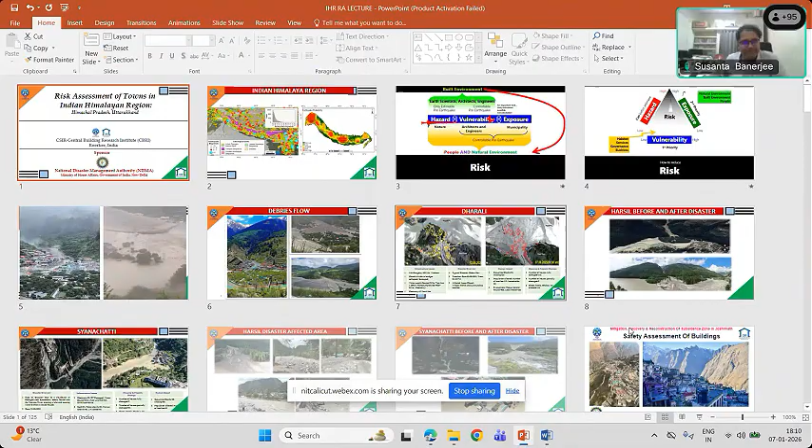Yes, your screen is visible. Now, is my slides visible and am I audible? Yes sir, you are audible and your screen is visible, sir. Over to you, sir, thank you so much. So now, how much time slot do I have? Up to 7:30, including Q&A discussion. Okay, 7:15, I'll try to wind up.

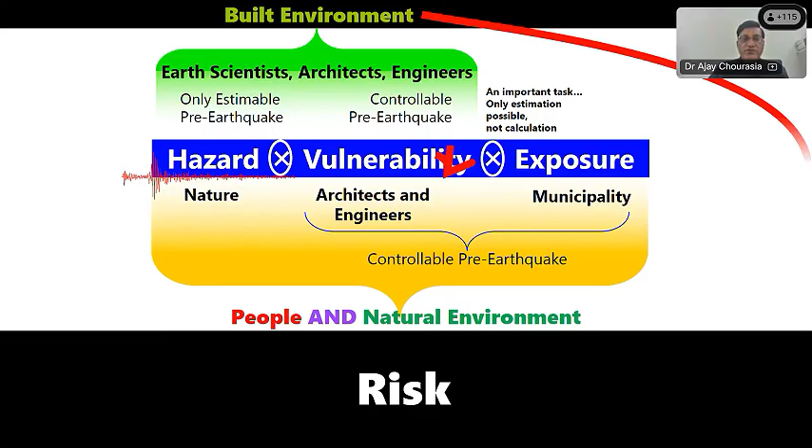So now, moving ahead from risk, how do you assess it? We need to prioritize it. As I mentioned, hazard - if you are sitting in a low hazard area, that is fine. But only things which are in our control, we should prioritize.

Our first priority should be the vulnerability of our infrastructure and buildings in particular, because it is directly connected with the loss of life. Exposure and other things are a second priority, and the third priority is hazard, which cannot be treated as a priority but can be estimated and understood in advance.

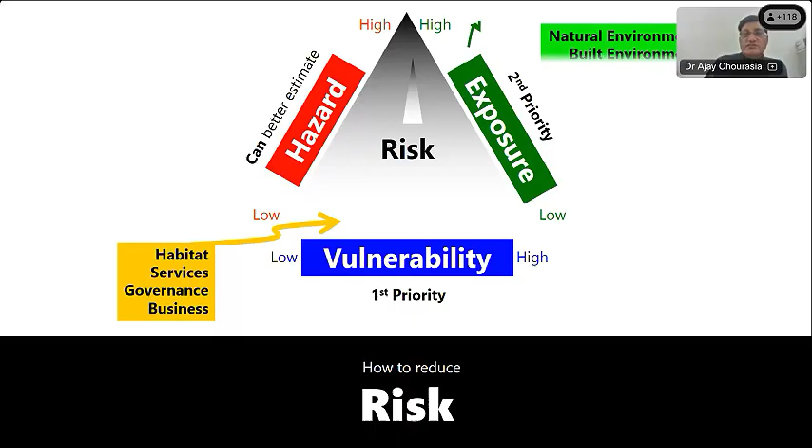So who is responsible to control the vulnerability? All engineers, all of us. So how to do it? That is one of the important tasks.

But before going into seismicity, I want to show you this landslide in Dharali. You can see heavy rock debris.

This video can tell you how hazardous the Himalayan region is. This is basically Dharali, where the incident occurred on August 5th. This Dharali town is a very important, strategically located town in Uttarkashi district, at 2500 meters above mean sea level. It is almost flat land here, but after crossing a few hundred meters, a steep slope comes, going up to 4600 meters, which is the foothills of Shrikand hills, and beyond that glaciers are there. That entire region is moranic deposit.

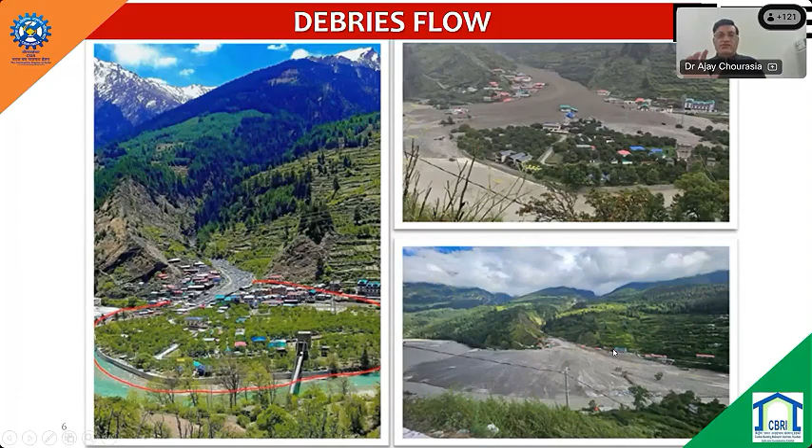This is the before and after picture, which can tell you the magnitude of the disaster.

Similar kinds of things happen. So this is Dharali. All the habitats were washed away, which is causing loss of life, property, and entire infrastructure in the region.

In a similar fashion, very next to Dharali, hardly 8 kilometers afterwards, the incidents happened on the same day. You can see the pictures before and after the disaster. This is nothing but excessive rainfall and debris flow, and how the habitat is affected because it's sitting on a steep slope or flat ground.

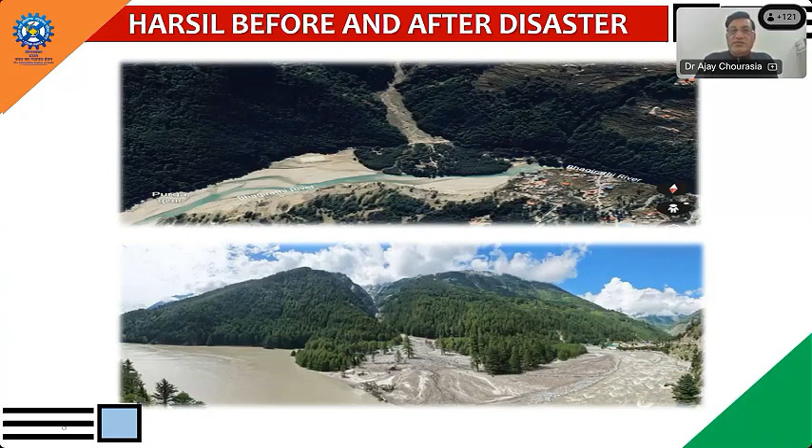Not only earthquakes but other disasters also occur. Similar kinds of incidents again happened in the same district on the 22nd of this August.

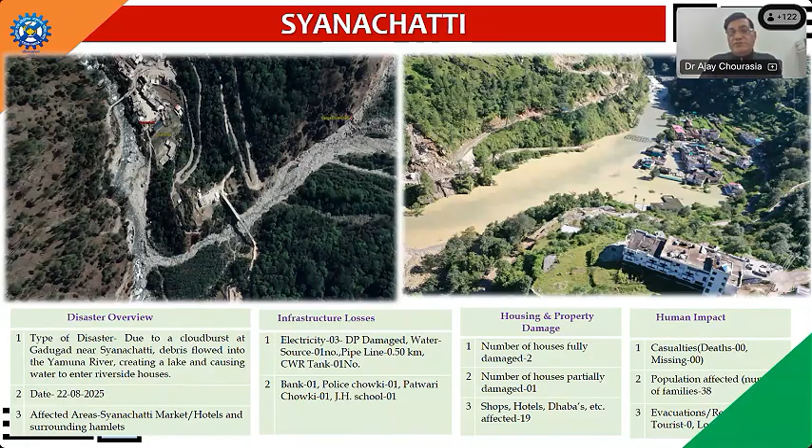What exactly happened here is: because of excessive rainfall, the landmass flowed away and the entire Yamuna river was blocked, and an artificial lake was generated, submerging the entire town called Syanachatti. You can see this town on the right side, totally inundated, with two-story buildings totally submerged. After the breaking of this temporary, artificial dam, when water washed away, all the houses were filled with mud. So just imagine, not only property but loss of life has also occurred.

Again, I will take you to January 2nd, 2023. You must have heard about the Joshimath incident, where the town you see here was under threat. It was huge subsidence of landmass, as reported in the media, and we were called to help in this disastrous situation.

When I went there, around 2500 buildings were sitting on a moranic deposit. Because of excessive discharge of water at the foothills, excessive subsidence occurred. At that point, water was emanating and subsidence was happening, and it affected not only the buildings but all the infrastructure, including roadways and hospitals.

One second. Hello, am I audible? Yes sir, you are audible. Okay, thank you. Dr. Banerjee, whenever something happens, please ring from your phone number. Sure sir, thank you.

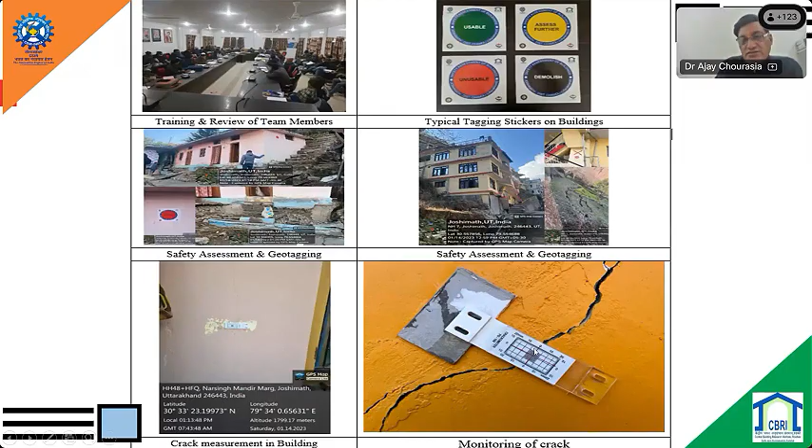Because of subsidence, this crack meter was placed across the cracks, and everyday measurements were taken. After the measurements were taken, we classified the buildings as per different damage classifications, which are adopted in our Indian standards as well as internationally.

According to that, we pasted stickers on each building: usable (green color, assess further), unusable, and demolish. Wherever it was risky and needed assessment, we vacated such buildings. Wherever no damages were there, people were allowed to continue staying. But in the red and black categories, we totally removed the people and demolished certain buildings also.

This kind of instant reaction and preparation comes from your past experience, because at that point people have a lot of expectation from you to help them. Based on the data collected over around one month, each building was classified under different classes—red, yellow, green, and black—and the entire region was divided into 9 wards, with buildings classified as shown here, indicating how many buildings fall under each class in each ward.

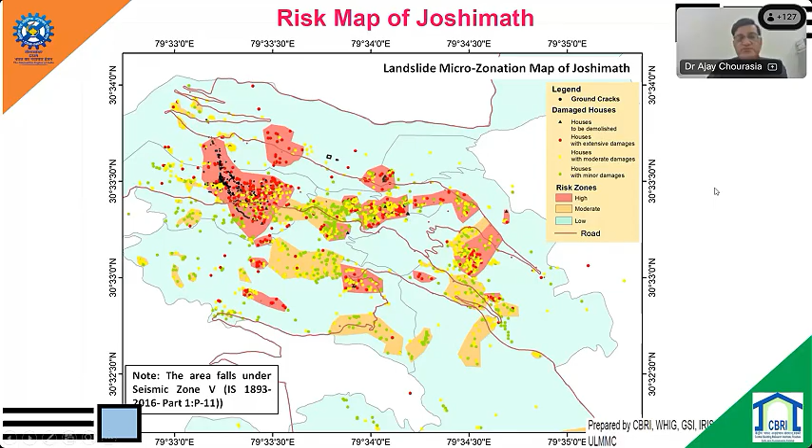Having faced this kind of scenario, now you will come across what the seismicity of this region is. As it is understood, it is very high, and the entire Uttarakhand or Himalayan region is classified under seismic zone 6 in the revised seismic zone map of India. In this revised map, you have to see that the importance of the building is not reflected.

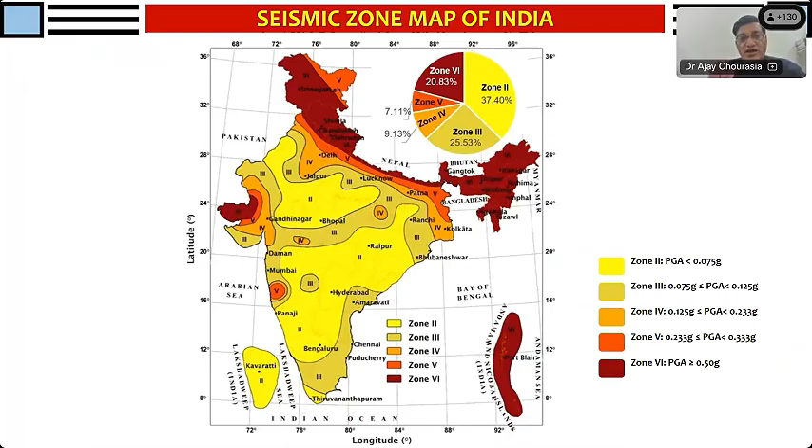You have to find out your zone factor based on the return period, and these return periods are classified based on the importance of the building. For normal buildings you are asked to take a return period of 475 years, and for important buildings or critical infrastructure, it is 975 years. As you go to a higher return period, your Z value also increases. But in short, I want to tell you that this entire region is under high seismic zones of India.

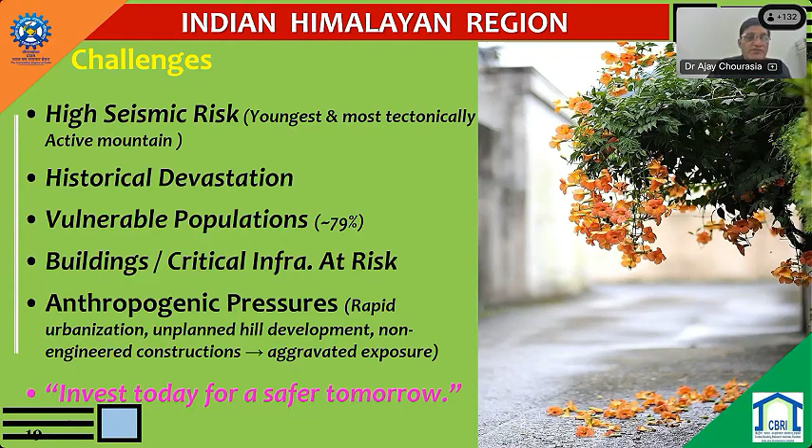Now, when I talk about the Indian Himalayan region, what are the challenges? It is a high seismic region. As I mentioned, historical devastation has happened enormously in that region, and around 80% of the population is highly vulnerable. They are sitting on very high vulnerable locations, steep slopes, and other things. All buildings are at risk because most construction is happening using unreinforced masonry, which is known for collapse even under moderate shaking. In addition, anthropogenic pressure - rapid urbanization, unplanned hill development, non-engineered construction - has aggravated the exposure of the community at large.

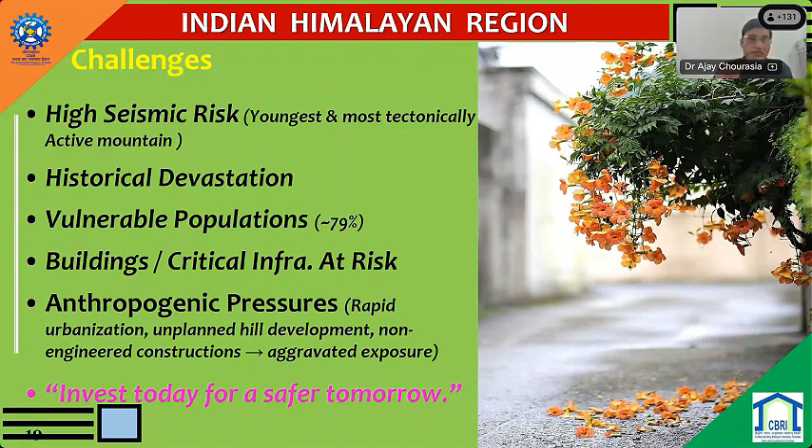So this is high time we need to think about this particular region. As I mentioned, for risk, you have to focus on the central pillar, that is vulnerability. So our objective was to take up the risk assessment study for towns. We were asked to take it up for 6 towns, 3 in each state, Uttarakhand and Himachal. For that purpose, we conducted a detailed study related to hazard, vulnerability, exposure, and risk. With this project, we came up with a very simplistic procedure for estimation of risk, and that's what I want to focus on during the discussion.

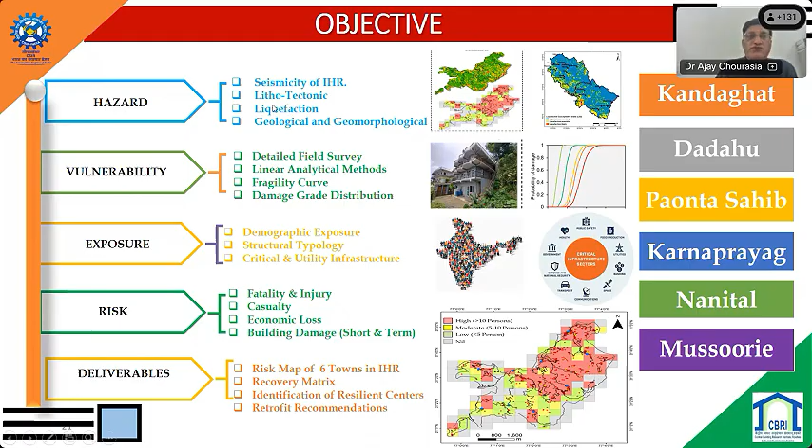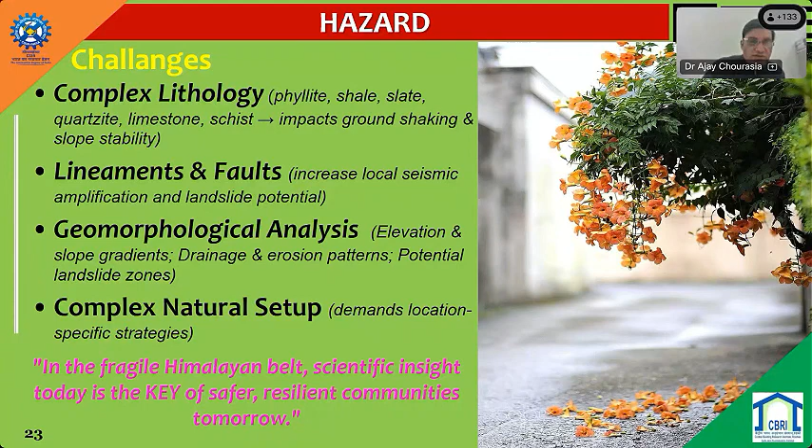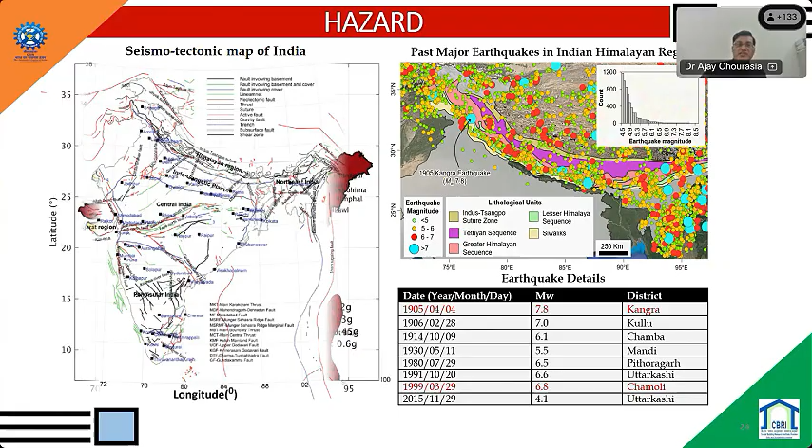Our revised or updated Indian standard also mentions seismic zone 6, and over and above, we have studied the geology of that particular region - thrust and fault, lineament information, geotechnical properties, and susceptibility assessment. So we have not conducted any new study, only reference values from the literature have been taken.

In addition, we have the map of earthquake and liquefaction. Earthquake hazard is very clear in that particular region. For liquefaction, people have reservations saying it will not occur, but at a few locations there is a possibility of liquefaction. So that aspect cannot be ignored and has also been considered in this study.

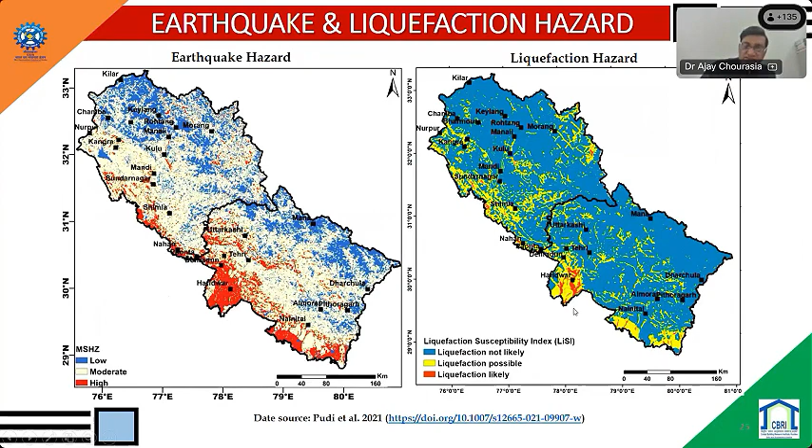In short, we have to take a holistic view for assessment of risk. So now we are focusing on one of the components, that is hazard. For that particular component, we are not conducting any new research at this point, but taking reference from the latest literature related to hazard in that study area.

From our seismic zoning map, it is very clear that this region is likely to experience a PGA of 0.7 G, and that has been taken care of in the study. From the extreme rainfall or landslide point of view, we have correlated landslide as a result of excessive rainfall. Landslide will occur only when sitting on a very unstable strata or slope, and extreme rainfall causing more than 50% ground saturation results in landslide.

Now, whenever an earthquake happens, there will be subsidence. That hazard level has been marked in terms of displacement - the spatial distribution of hazard in different classes: more than 5 centimeters, 3 to 5, 1 to 3, and less than 1 centimeter. Similarly, landslide susceptibility has been estimated in terms of factor of safety - less than 1, 1 to 1.2, and so on. Based on these two aspects, the multi-hazard scenario matrix was created.

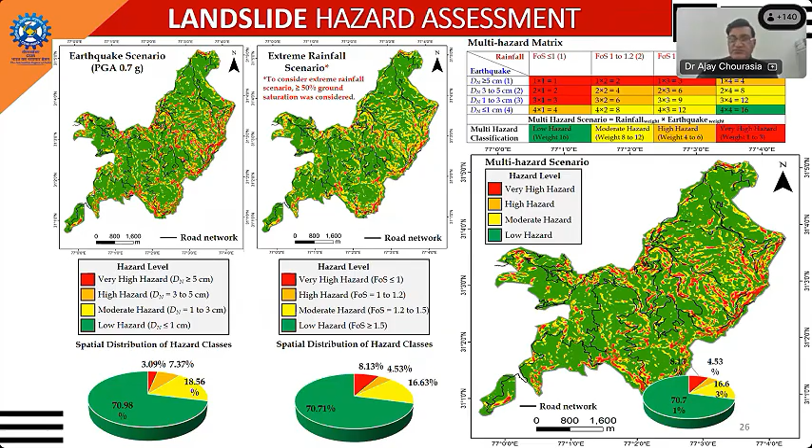Now the question lies about the vulnerability of our built environment. When you talk about buildings, 85% are non-engineered, unreinforced masonry, and soft story buildings have also come up in the run of this modern class of buildings.

These buildings are sitting on steep slopes, poor ground strata, where the amplification effect is likely to be significant. In addition, critical facilities like hospitals and schools are also constructed using unreinforced masonry, so they are highly exposed. The trend is increasing due to poor implementation of good construction practices and absence of bylaws. So physical vulnerability, social vulnerability, and economic strains are increasing largely.

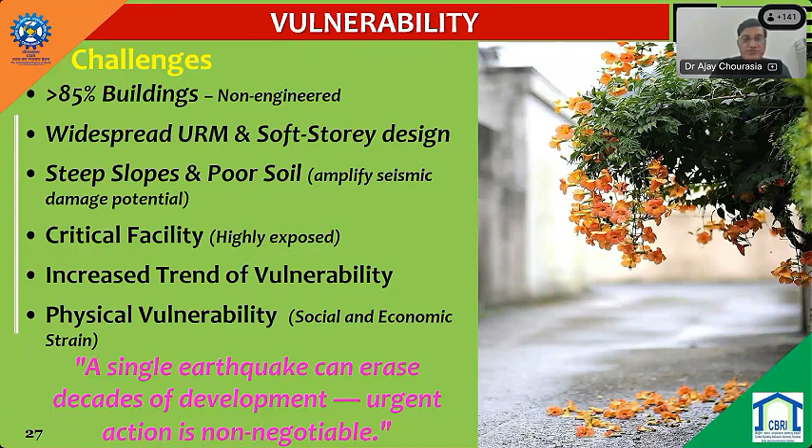We need to focus on that particular aspect. Our approach was to first conduct a survey, collect information about the buildings through physical survey on building typology, architectural aspects, seismic vulnerability parameters of individual buildings, and then whether the building is sitting on a steep slope, flat ground, or moderate slope ground - protection measures and other things have also been noted for each building, apart from construction aspect and distress assessment. This is what we covered during our site visit.

In addition, the data we collected has been utilized for development of a fragility curve. We have developed the fragility curve from an Indian perspective for unreinforced masonry and RCC structures, RCC buildings, by adopting a procedure I will explain. These two approaches have been adopted to estimate the risk of the element and the structure as a whole.

In addition, this is related to the earthquake. But what happened with the landslide? From a landslide perspective, we studied detailed geotechnical parameters, terrain conditions, and the saturation level in the ground in case of excessive rainfall, and that has been attributed to the risk of landslide.

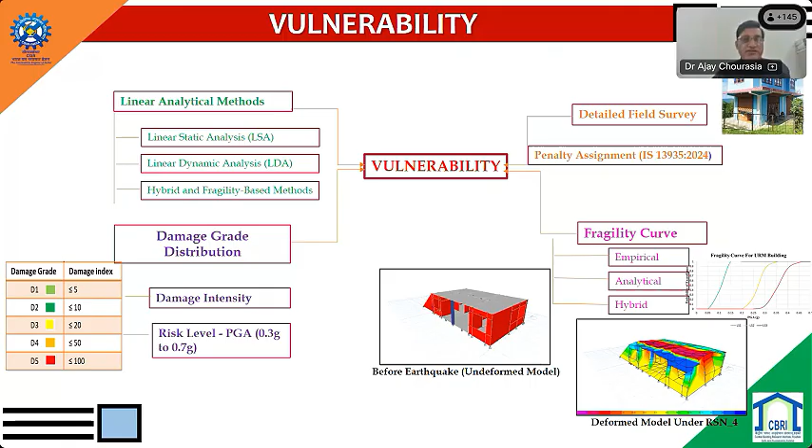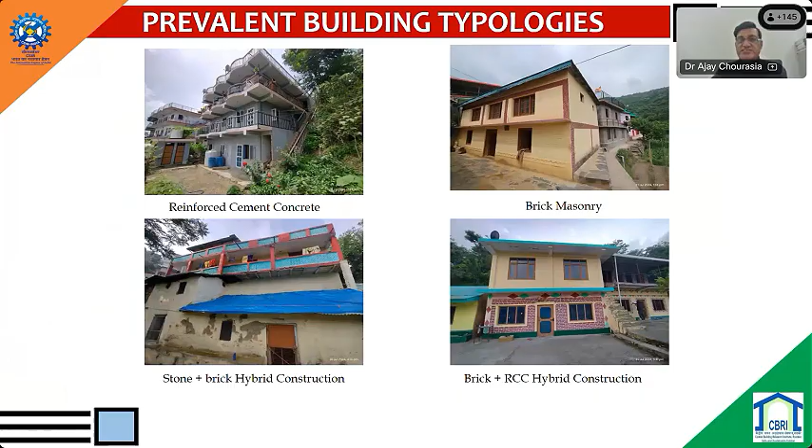This was done by conducting linear static analysis, linear dynamic analysis, and based on that the fragility hybrid curves were developed. This is the typical building typologies of different classes of masonry and RCC structures which exist in that study region. A detailed survey map and survey form have been designed, and this data collected has been utilized for grading the economic loss inducing factors.

So again, these economic loss inducing factors as per our IS 13935:2024 give emphasis on features like siting and ground issues, soil and foundation condition, and thereafter architectural features and elements, then structural aspects and materials used for construction.

And corresponding to each parameter, some penalty assignment has also been given, which is in the code, and which we have modified based on ground conditions and past vulnerability or loss which has occurred in earthquakes in Indian conditions. Based on the total penalty, subtracted from 100, less than 10 has been classified as minor, then 11 to 40 as moderate, and more than 40 points is classified as severe.

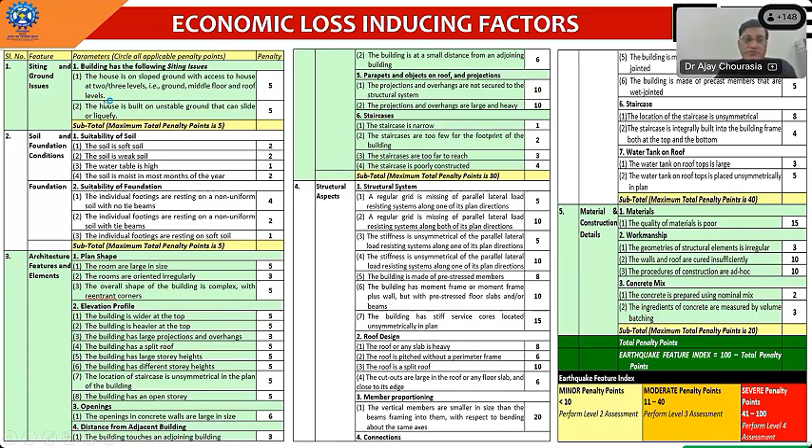So this is a very straightforward, not exactly prescriptive, but straightforward procedure based on site observations.

Parallelly, we have developed the fragility curve for masonry and RCC buildings based on different international standards like HAZUS, FEMA 273, MSK intensity scale, ATC 20 and 13, and so on. Then seismic as well as landslide aspects have been combined.

As you can see, the seismicity has also been related, whatever damage class has been categorized LS1 to LS5, corresponding to different kinds of damages and flow velocity of water. Based on that, the fragility curves were developed. So this is a multidisciplinary, multi-hazard fragility curve that has been developed.

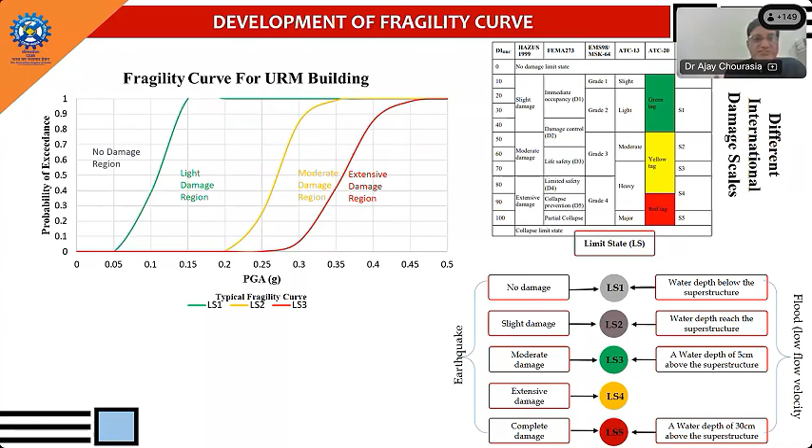So the fragility curve is basically nothing but the probability of exceedance of damage at varying intensity. In the present case, we have the PGA values for this particular region up to 0.7 G. So we have carried out detailed investigation and fragility curve development by adopting this methodology.

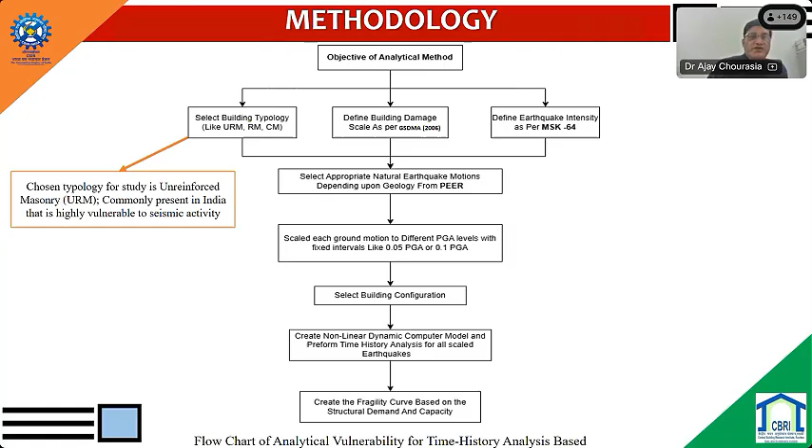This is basically a structured approach to develop the fragility curve for URM buildings. For example, in this case we have taken it in accordance with national and international standards. For national standards, we have adopted IS 1893/2025 provisions. Then unreinforced masonry provisions we have picked up as per Indian conditions.

Then for defining the building damage scales, HAZUS and ATC 20 have been adopted, thereby classifying the damages into three classes: light damage, moderate damage, and extensive damage.

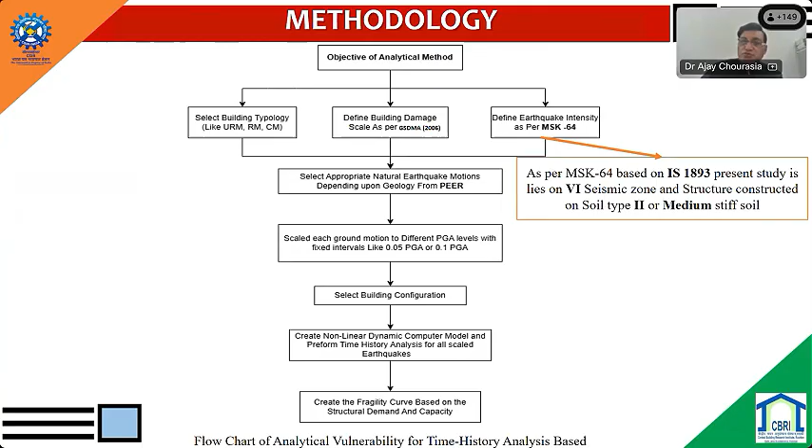Thereafter, as regards defining the earthquake intensities, seismic zone 6, 0 to 0.7 G has been considered with soil type 2 and medium stiff soil conditions.

Then for conducting the fragility curve development, we have considered 11 ground motions of similar kind of region from the database of the Pacific Earthquake Engineering Research database.

So while selecting these ground motions, you have to consider the geology and geotechnical aspects also, and based on that you have to pick up the appropriate ground motion records from the database, and you need to ensure the adequate scale factor achieved is not more than 2.

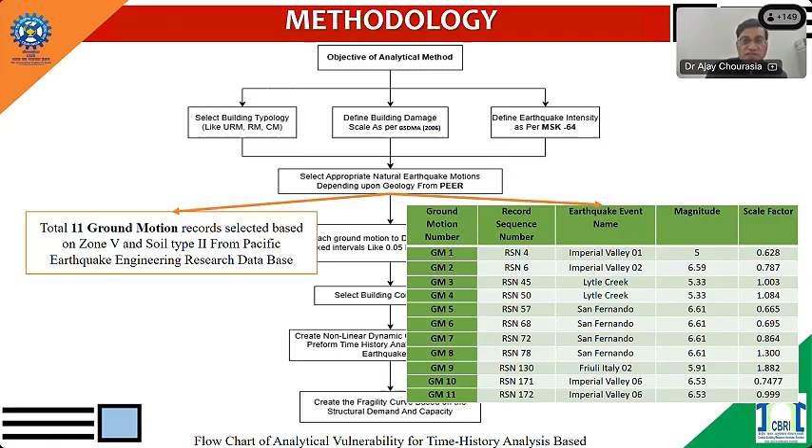That is again the caution while developing the fragility curve. Then all these go into developing the fragility curve. In this stage, we have selected the motions, and we have scaled the motions from 0.05 PGA to 0.7 G with the help of the Seismosignal tool.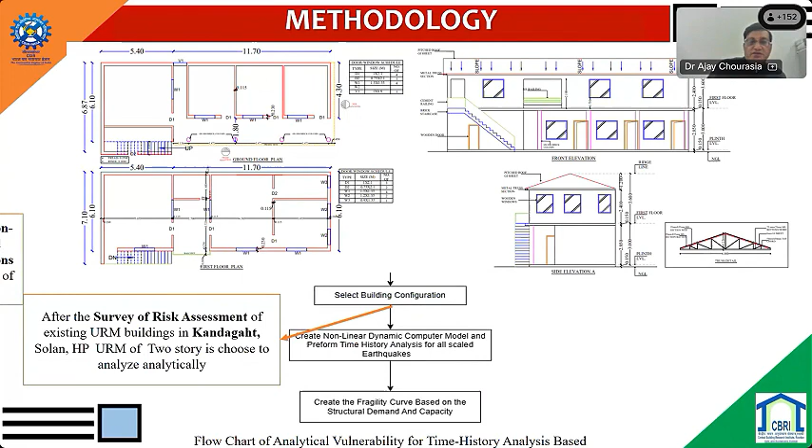And then after the survey of risk assessment of these buildings, we have selected a few real life buildings and their typology, material, as well as geometry to conduct such kinds of investigations.

With the help of ETABS, we have conducted the non-linear dynamic analysis of the buildings using 11 ground motions up to 0.7 PGA at the interval of 0.05 PGA, and recorded the maximum spectral displacement at the rooftop.

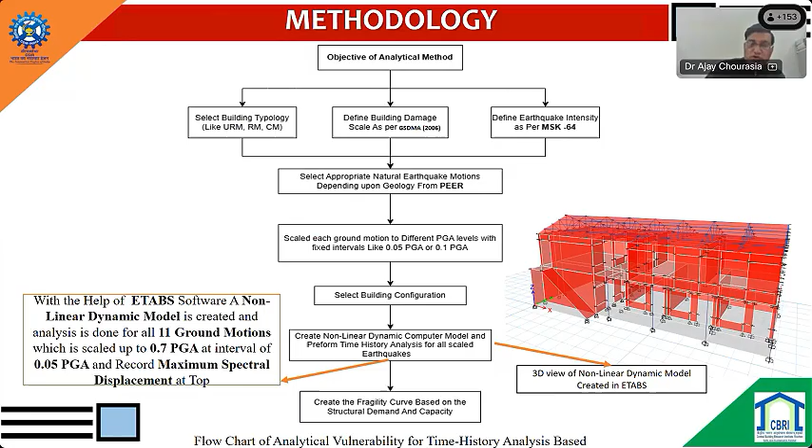Whatever displacement we recorded, that matrix was utilized for calculation of the post-probability density function. Thereafter, during this exercise, we have to calculate the cumulative distribution function, then standard deviations, and calculate the A and B constants as a random variable and mean samples.

So the steps involved are: determination of spectral displacement from non-linear dynamic analysis, then defining limit states in terms of light, moderate, and extensive. Then calculate the mean and standard deviation, and thereby the parameters A and B. Afterwards, for each LS1, LS2, LS3, calculate the CDF and PDF based on given A and B for different classes, then develop and plot the fragility curve.

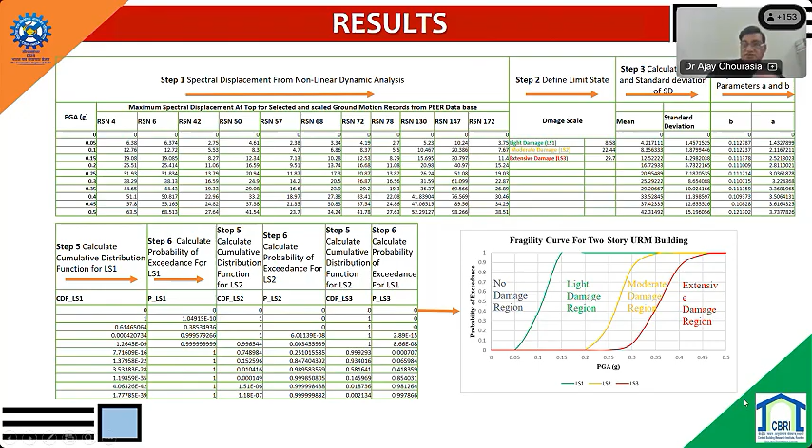So this is a very Herculean task, which we have completed after rigorous analysis. You can see that we considered all our design parameters, mode shapes, and other things.

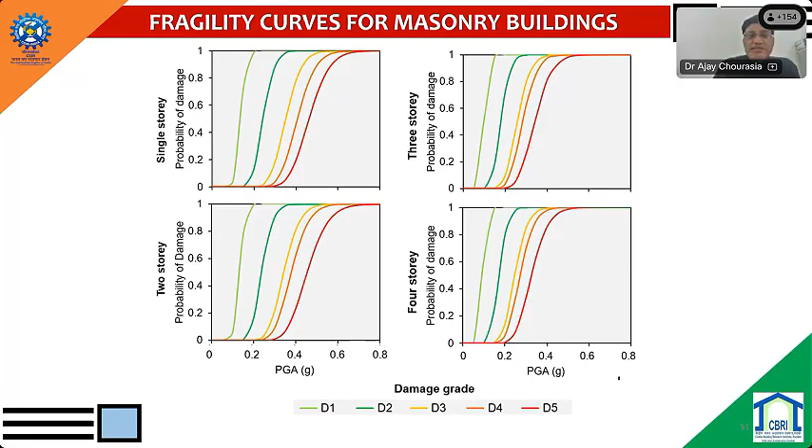This is how the unified fragility curve for masonry buildings for single story, 2-story, 3-story, and 4-story have been developed. Now the user can directly use these curves to classify vulnerability based on observations recorded. Importantly, this will give the state of damage at varying PGA levels. This exercise has been done for RCC buildings as well.

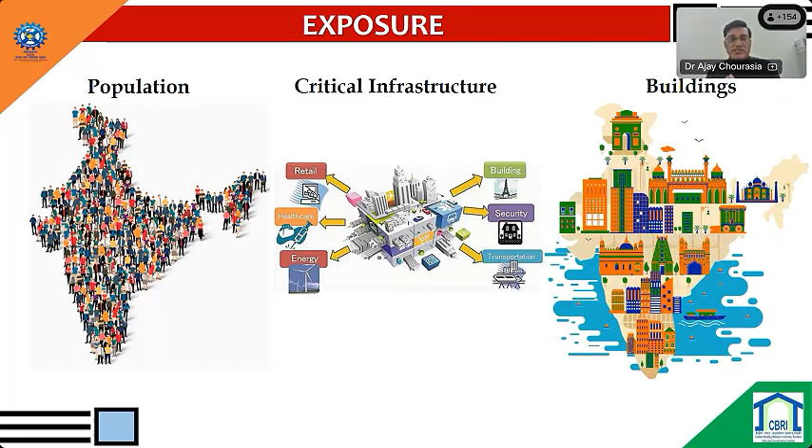Now, the third component is exposure. As mentioned, exposure is the effect to population and critical infrastructure, particularly buildings and other infrastructure, which includes buildings, schools, healthcare, transportation, bridges, and so on.

When you talk about the exposure of this region of India, it is at very high risk, because of the dense cluster of population at very limited locations. Assets and critical infrastructure are located in strategically very important regions. From the Indian perspective, systematic vulnerability assessment needs to be done for this region.

Based on this method, we have done extensive survey and fragility curve development, and data collection for exposure calculations and hazard. We have taken this from literature and past records.

Now coming to risk, we have developed a method to assign risk in terms of number of fatalities, injuries, homeless, and economic losses. For buildings, we assess how many are unusable, usable, and how many will collapse.

This model has been developed based on past damages occurred in various earthquakes in the Indian context for Indian buildings, and that has been classified in terms of a casualty percentage for computation of human losses, ranging from D1 to D5 category, indicating how many people are likely to lose their life or be injured.

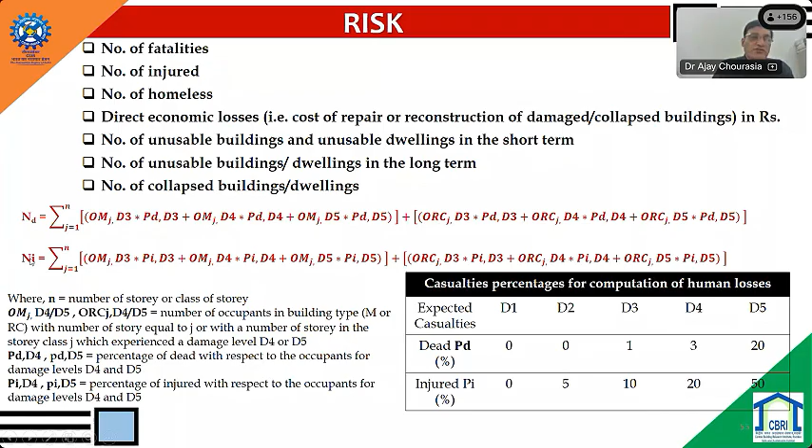This kind of matrix has been developed and implemented in this model to calculate the ND and NI. Similarly, the consequence model has also been developed using this approach to calculate the expected loss of property and other economic losses.

For this calculation, we considered the cost of construction of a building in that region as 30,000 rupees per square meter for masonry buildings and 34,000 rupees for RCC structures. In addition, damage grades have been classified from D1 to D5, and how many buildings will fall under three verticals.

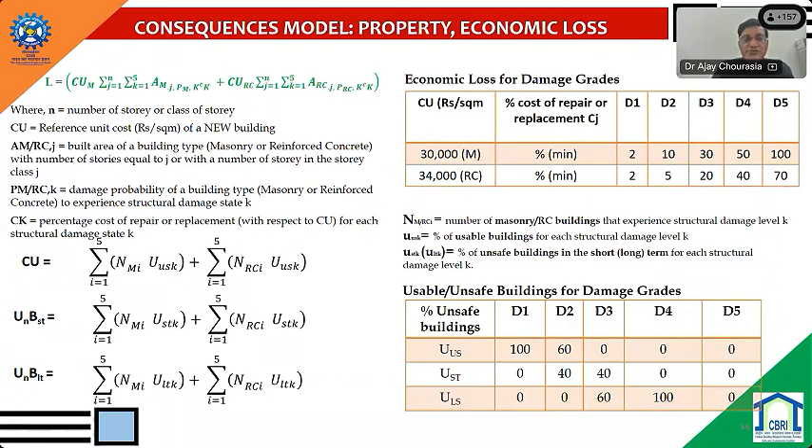So basically, as researchers, we have developed the modeling aspect. Then for the survey purpose, our engineers along with government and state PWD engineers did the survey, and the database was analyzed based on the methodology I have explained.

Now I would like to present before you one of the towns, that is Kandaghat, for which the detailed implementation of this procedure has been made. Kandaghat is one of the towns located in Solan district of Himachal, which is around 26.13 square kilometers.

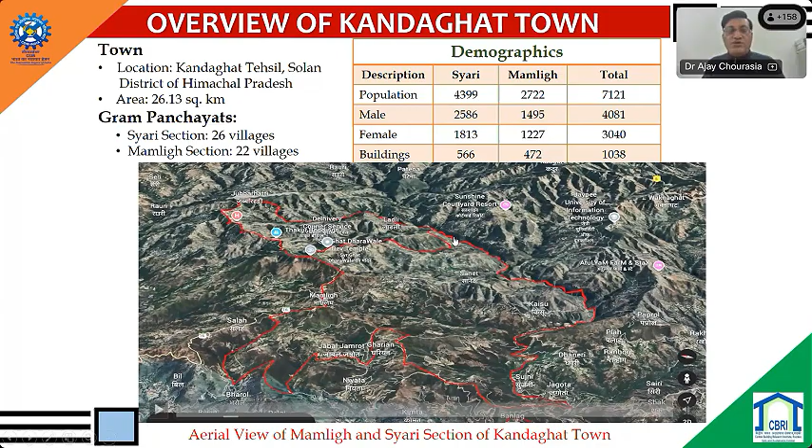You can see only 1,000 buildings sparsely located in 26 square kilometers in a hilly region, which is a very great challenge to do the survey, because to reach some houses we might have to walk for 10 to 15 minutes, sometimes 1 hour also. Very difficult task, thanks to my team.

This is about the demographic details of that particular town under study. Then the lithological features of the town have been studied in detail, and the vulnerability aspect has been studied by door-to-door survey, capturing the data and classifying the building class in different low, medium, or high susceptible locations by means of these dots.

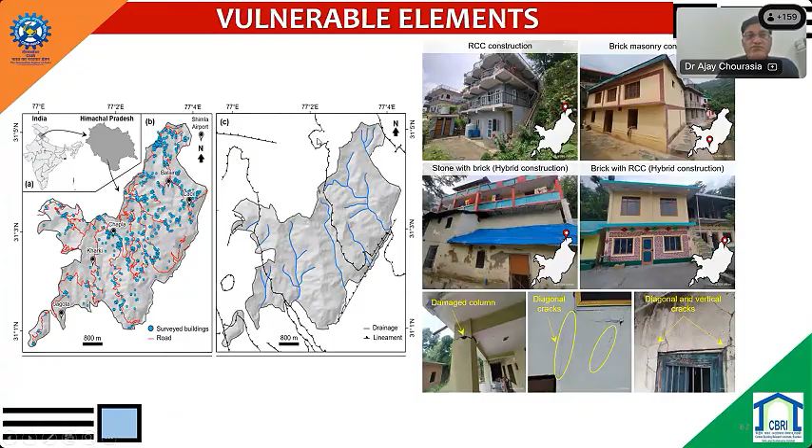Again, from a landslide point of view, the buildings located near steep slopes have been classified appropriately and demarcated here. For that classification, we considered building locations with respect to steep slopes, classified as less than 50 meters, 50 to 100 meters, and more than 100 meters under low, medium, and high risk classes from a landslide perspective.

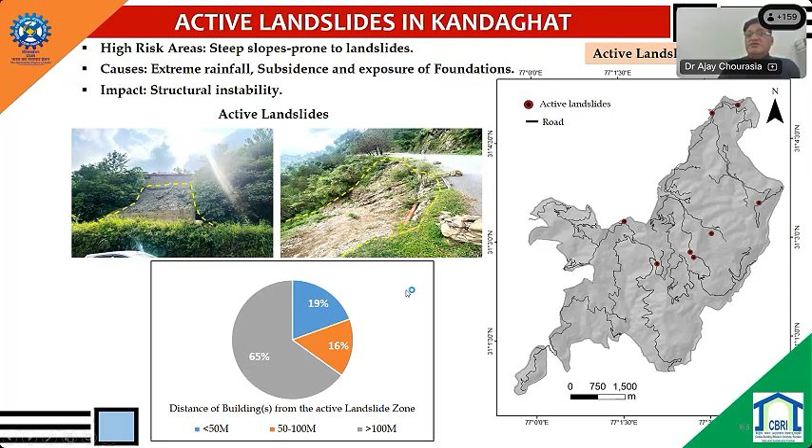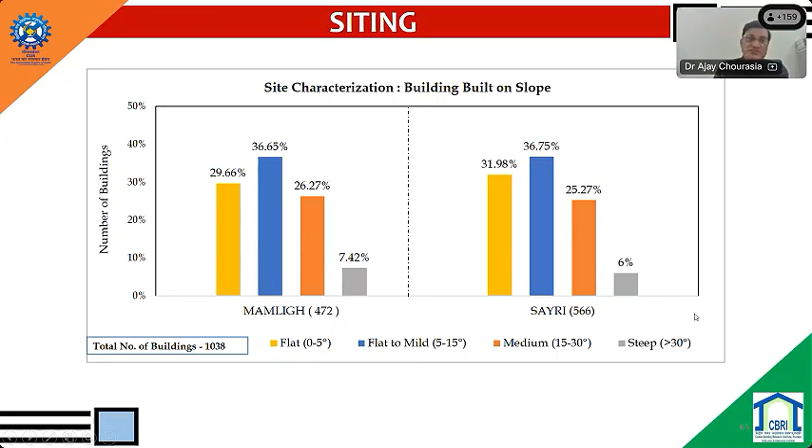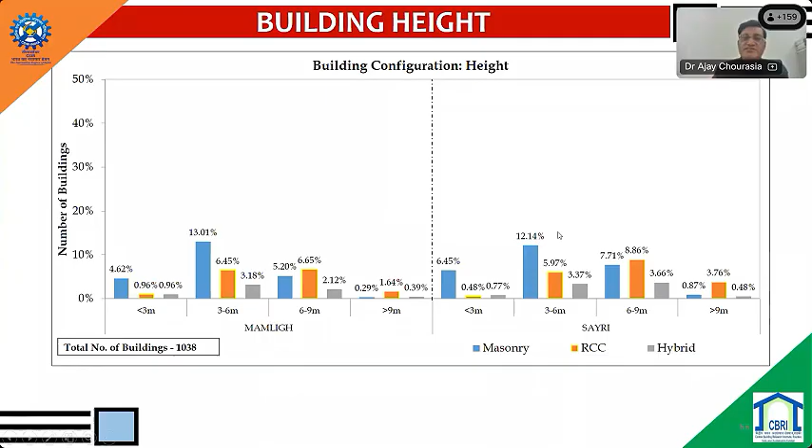So how many buildings are sitting on steep slopes, medium slope, or flat to moderately flat land? Similarly, in terms of height, we have to see how many buildings are 1, 2, 3, or 4 stories. Majority of buildings are 2 to 3 story buildings, majorly 2-story.

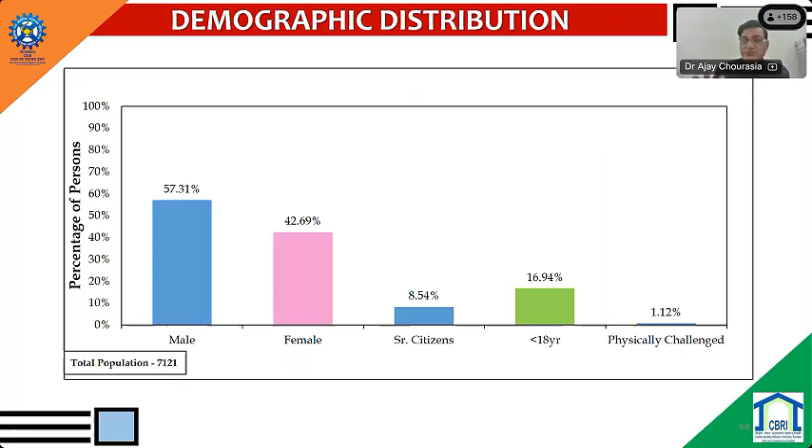Then demographic distribution has also been studied, how many people in terms of male, female, senior citizen, because this is also very important, including the population which is less than 18 years and more than 60 years. Other than that, the physically challenged people also.

So you have to see from different perspectives, and to address the socio-economic aspect, we used a questionnaire asking whether the population is aware about building bylaws, whether they want to adopt new technologies, and all those things. This is very important feedback for the government.

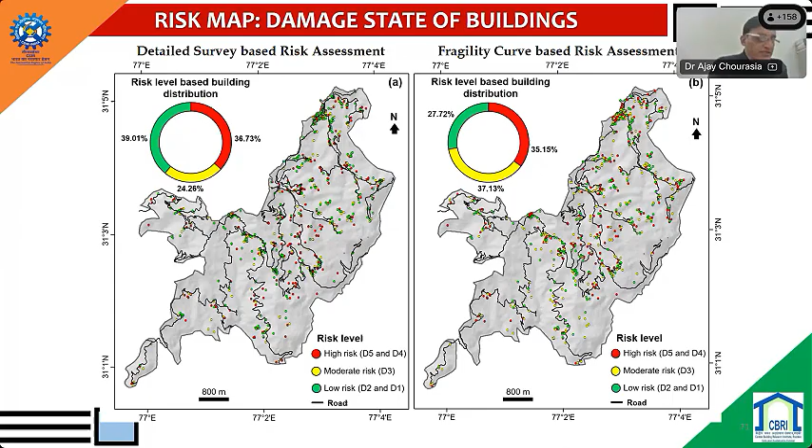Now, based on the survey and two different approaches, that is the codal approach and the fragility curve based approach, we have compared the data, and it is in agreement with each other when looking holistically from high, medium, and low risk perspective. That again gives confidence about the validation of our approach.

Whenever you are conducting a risk assessment of any building, particularly from the fragility point of view, you have to present a risk earthquake scenario. So, scenario based consequence assessment. Consequence assessment means how many fatalities, injuries, casualties, economic loss, and short term usable and unusable buildings, and long term unusable buildings.

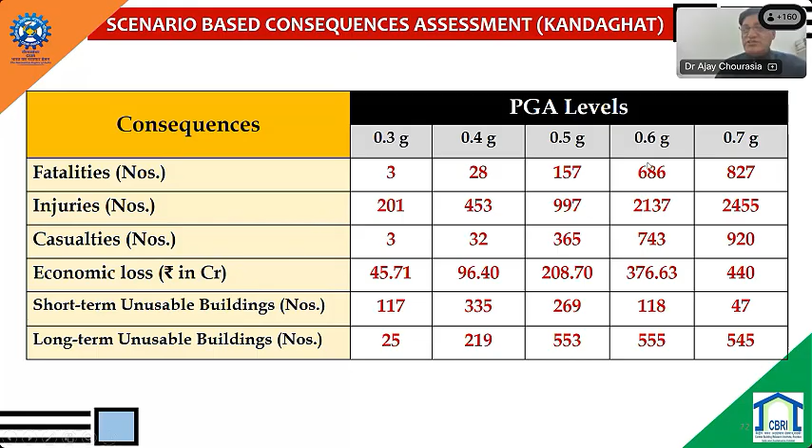So you need to classify this in matrix form for varying PGA levels from 0.3 PGA to 0.7 PGA, because that region is susceptible. The scenario will tell at 0.3 PGA what will be the loss, and at 0.6 or 0.7 PGA what will be the loss. This has been calculated for the given data. You can see here, as the PGA level is increasing, loss of life, property, and everything goes on increasing exponentially.

Now we don't have to stop there. What we have to do is plot these earthquake scenarios in terms of fatalities, casualties, and economic losses for different damage class intensities, that is PGA 0.3 to 0.4, 0.7, and other combinations. For fatality, this will basically elaborate in terms of loss of life in each grid. For that purpose, the entire area has been divided into a maximum grid of 200 by 200 meters, and grid-wise zonation has been done.

Important thing is, my relief centers like hospitals and schools should also be located in this region, so that I can provide immediate relief, because in the hilly region it is very difficult to take people from one location to another.

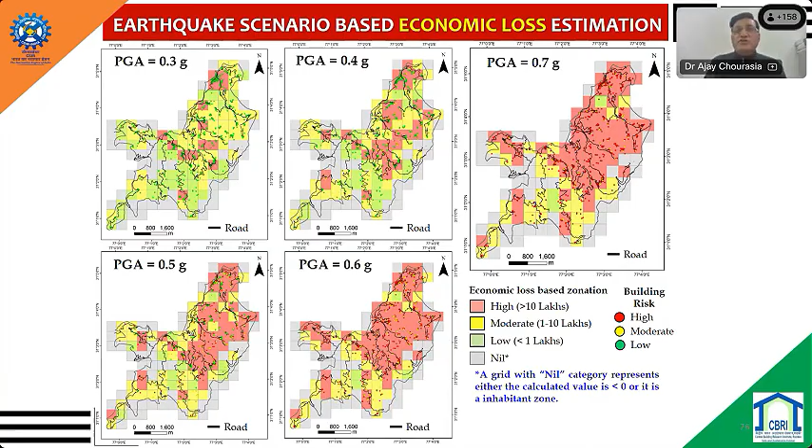During the survey, we have also studied critical buildings like educational or school buildings, government buildings, hospitals, police stations, power stations, and bridges which exist in that study area, and what is the class of damage at different levels of PGA. That has also been studied, which clearly shows that at higher levels of PGA, the damage will be very high.

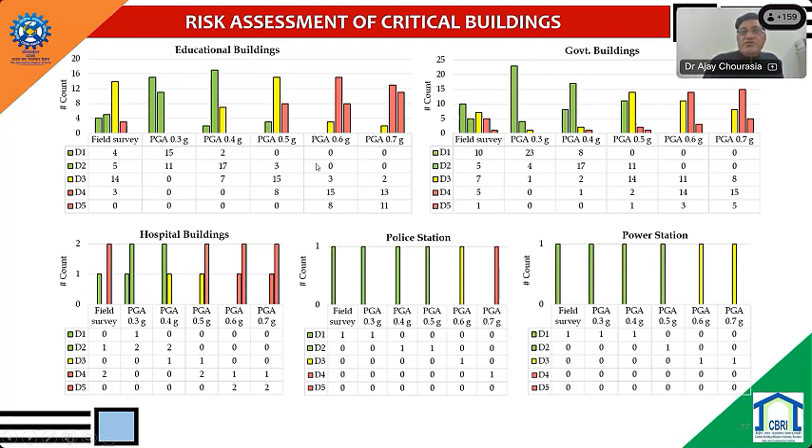Unfortunately, most of the important critical buildings are susceptible to excessive collapse, I should say, at a PGA of 0.4 even. You can see this from this particular data.

Now, another important point we added is about the projection. Can I improve, create awareness, sensitize the people, implement my bylaws strictly, so that people will adopt good construction practices, and in future the loss may be minimized?

If I do so, what will be the implication? That has again been done in terms of population affected and buildings. So from the past data, each region has been extrapolated by developing the relationship, to determine what the population will be after around 6 or 7 years, and around 2050. This data was extrapolated based on past records.

Then, if implementation of bylaws, earthquake resistant design, and safe construction practices are done, what will be the impact? That has also been calculated, which clearly shows that if we implement it properly, the possibility of loss of life and property reduces significantly.

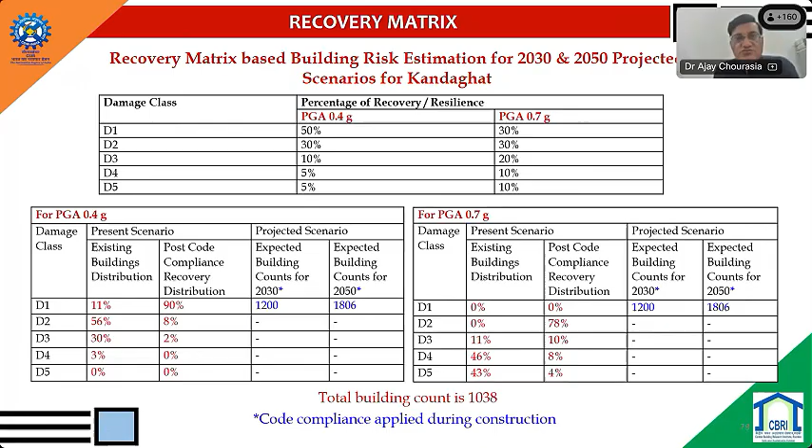Now the question is how to deal with it. That is one aspect from the vulnerability point of view. Now, immediately from the administrator's point of view, how should he react?

Based on the analysis, we have identified locations with good school buildings or safe locations where I should construct resilient centers, which will act as relief centers for storage of food, providing water, and temporary or permanent houses to the people immediately after disasters.

Not only have we identified the locations, but such locations should be approachable after the disaster. It should not happen that a very good building is constructed at a particular location, but cannot be accessed because a landslide occurred or the road is washed away. So we considered all these aspects, and based on population distribution and building distribution, relief centers have been identified that will help the administrator react immediately in a post-disaster scenario.

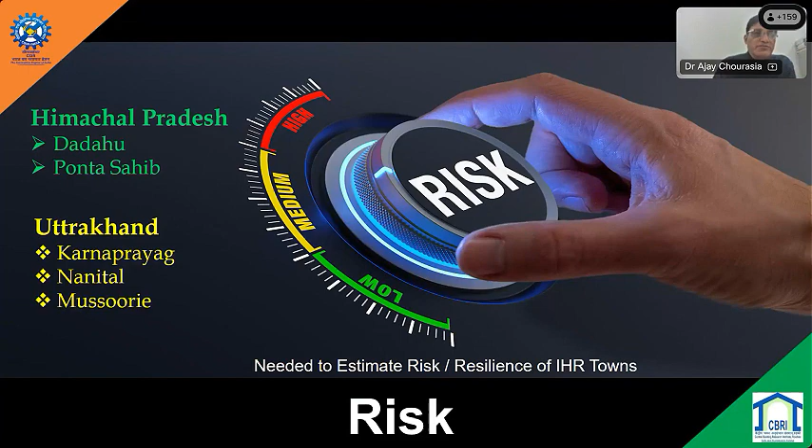So that is what we should do for the entire country, all vulnerable locations and towns. We have done this for 6 towns as a pilot scale, sponsored by NDMA. I have presented in detail the Kandaghat town in Himachal, and these are the 5 other towns. I will quickly browse through the observations.

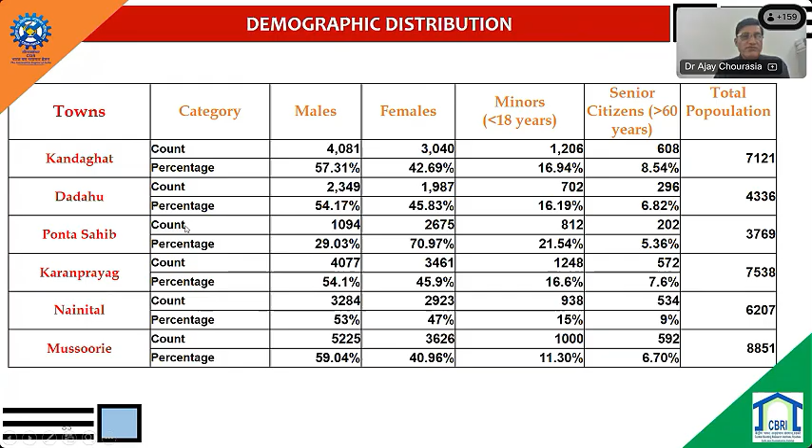Then the damage class based on the methodology and observations. So different damage classes from D1, that is slight damage, moderate damage, substantial damage, very heavy damage, complete damage, and total risk have been computed. Total risk has been computed based on the summation of D4 and D5 category, which indicates that the total collapse and possibility of life loss will be excessive in that case.

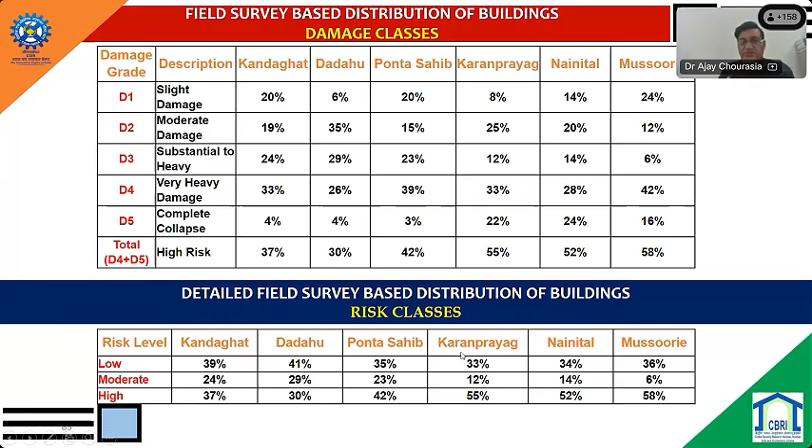Detailed field investigations have been carried out based on this, which shows the loss under different classes based on the survey. And similarly, based on the data, the application of fragility curve, this particular aspect helps us create the earthquake risk scenario for that particular town, which indicates that at moderate shaking, the entire town is at risk.

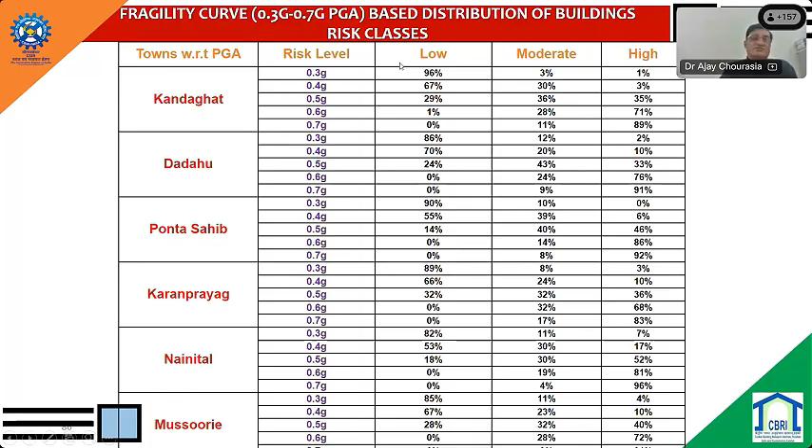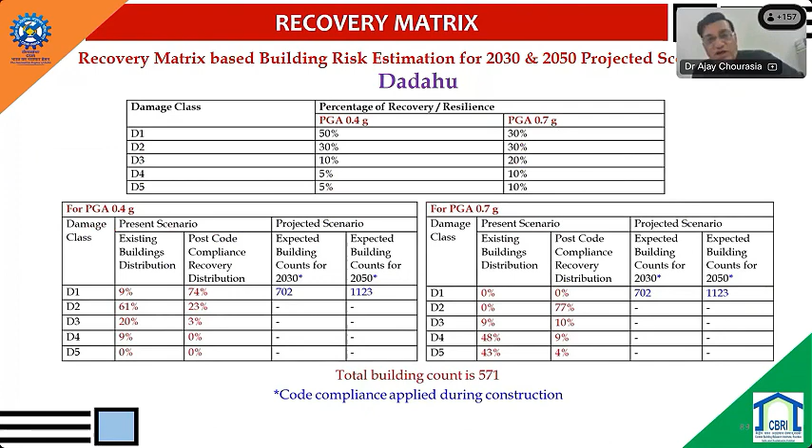So again, that exercise also indicates the damage grades for different buildings based on the field survey and fragility curve comparison. So this is the recovery matrix, damage recovery matrix, showing how should I mobilize, how should I fund so that good construction practices are implemented in these particular towns, and the damages in terms of loss of life and property can be minimized.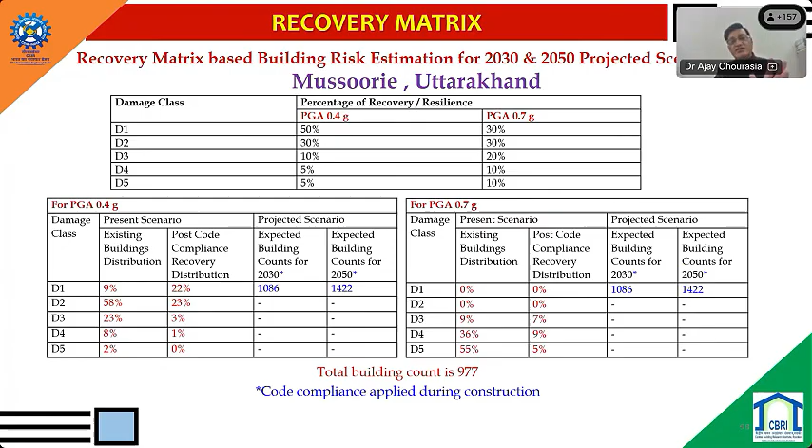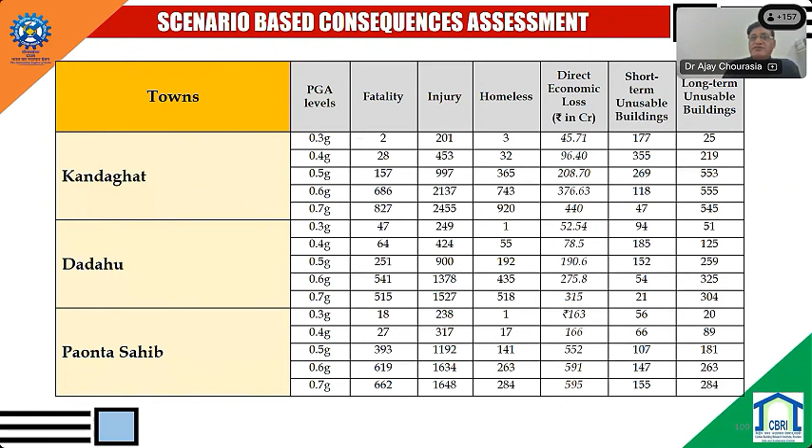So this exercise has been repeated for all 6 towns, and it has been noticed that there is good agreement between the survey as well as the fragility curve method, and that gives us confidence that this particular method is now proven and can be implemented on a larger scale for each town by different people of the country. So in short, if you see the study of 6 towns, around 5,000 buildings have been surveyed.

Mostly the highly vulnerable buildings. 93% buildings are non-engineered, 45% buildings are at high risk, which is damage class of D4 and D5, and which may result in loss of life.

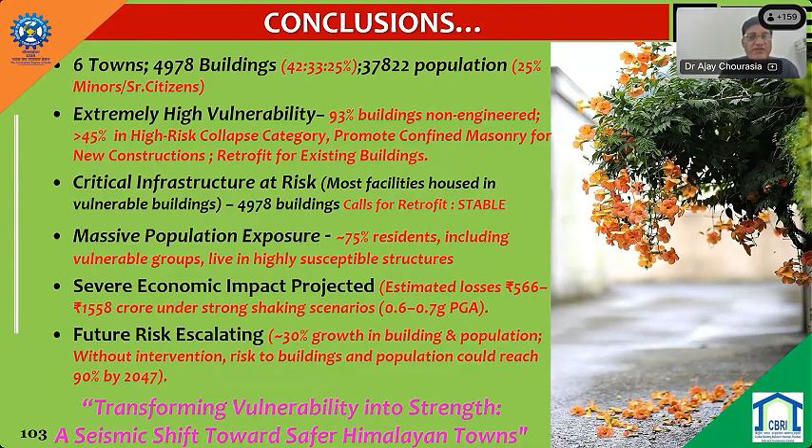So this is high time that we should focus on retrofitting of such buildings, and we need to promote confined masonry and other similar technologies for new constructions. So building bylaws implementation is very, very important. And exposure and impact, financial impact and other things will definitely put us in a very great loss.

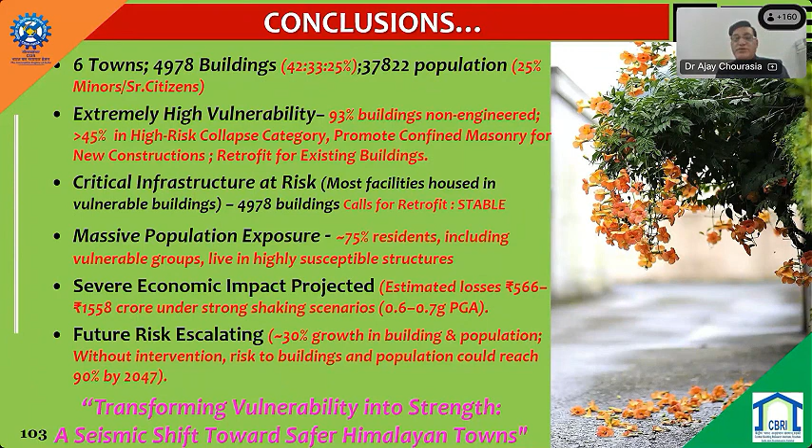That's why 1 rupee investment today for resiliency will pay me 100 rupees after the disaster. That is basically what we worked out. So now, when we are talking about Viksit Bharat, we should focus step by step on incremental resilience, bringing resiliency into our system.

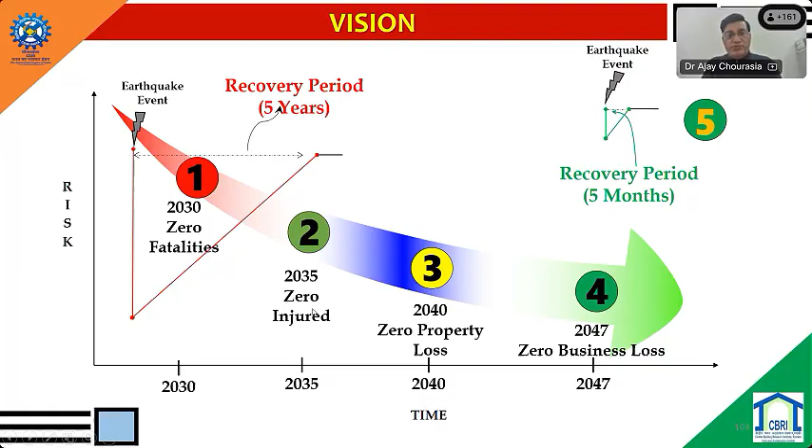So nowadays, whenever disaster occurs, to create the pre-disaster scenario again after the disaster, it takes around 5 to 10 years. So we need to reduce that time window to 5 months, and that can come if we construct our buildings properly, new buildings particularly, and existing ones should be retrofitted.

For that particular case, what we need to do is code compliance and retrofitting. I will tell you simple retrofitting methods we need to adopt. We should not go for very complicated ones.

We have to focus on risk-informed, safe land use planning, then institutional coordination, because after the disaster everybody starts blaming each other, so coordination needs to be developed. Then community awareness, capacity building, then mainstreaming disaster risk reduction, and then fostering research for making our community safe. That is very, very important.

So the important thing as a civil engineer is retrofitting, particularly for masonry buildings, which are very vulnerable, a high number of buildings are unreinforced masonry buildings in our country, and they are highly vulnerable. So can we develop a methodology which is simple, scalable, easy to implement, and cost effective also?

So that is one of the technologies we have developed at CBRI, called the steel twin lintel band technique. I want to just show you this particular one. This is based on our experimental evidence. We conducted a full scale test on an unreinforced masonry building when it is subjected to lateral displacement-controlled cyclic loading, and after the damage, it was retrofitted using this particular technique and evaluated for its efficacy. So what exactly does this method comprise of?

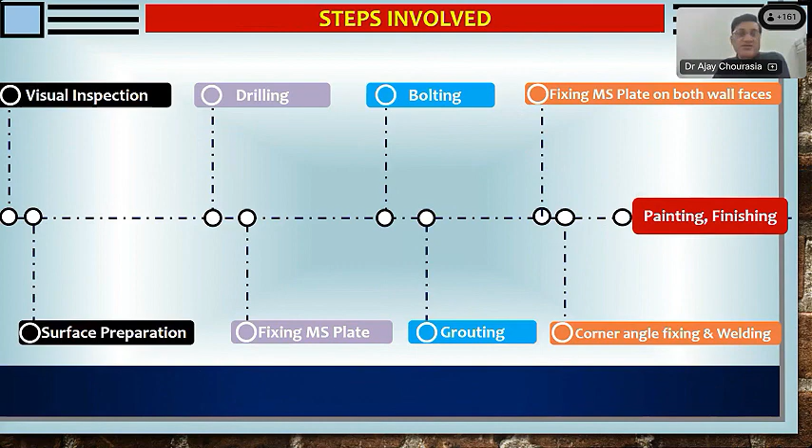It makes use of very simple tools like MS flats, angles, nuts and bolts, and drilling machines. It basically comprises of 8 to 9 steps.

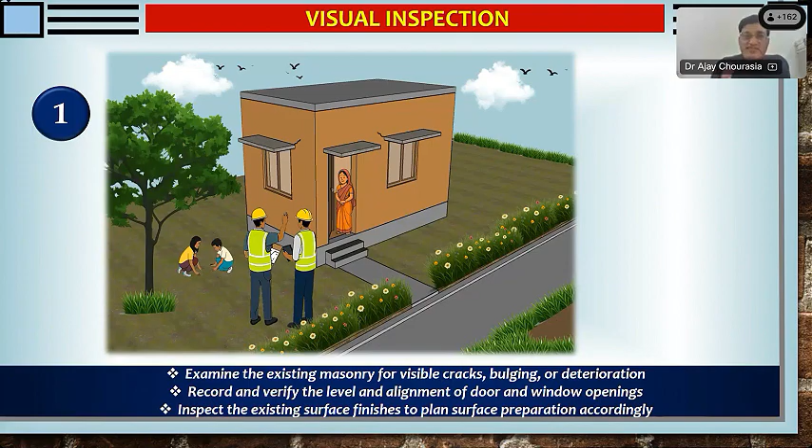First step includes the visual inspection. Once you see the building is unreinforced masonry, with no bands, nothing, then what to do?

After the examination, first of all, surface preparation, as our code says. I need to create a box action, an integral box action. For that purpose, I have to provide the horizontal bands and vertical reinforcement at the corners.

Horizontal bands at different locations, that is sill level, lintel level, or roof level, as the case may be, based on your location. So suppose for this particular building, I have to provide the lintel band. I have to prepare the surface, remove the plaster, clean the surface properly, and then drill 12 dia holes at regular intervals, maybe around 300 center to center.

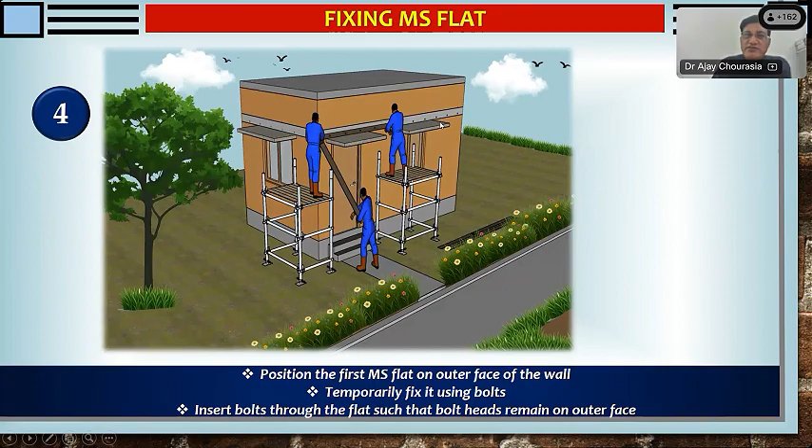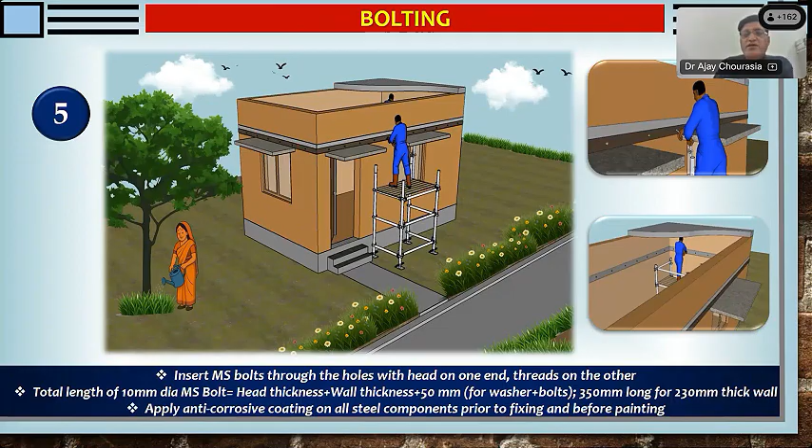After cleaning properly, I have to provide the MS flat from outside first, and then anchor it by means of a 10 dia anchor bolt. Once it is anchored, go inside and provide the additional MS flat section.

Before providing this MS flat section, the bolt should be grouted adequately after surface preparation and cleaning and removing the dust. Afterwards, tighten the nuts with washer, and thereafter protect it from corrosion with proper anti-corrosive treatment and painting, and provide the vertical confinement to the building.

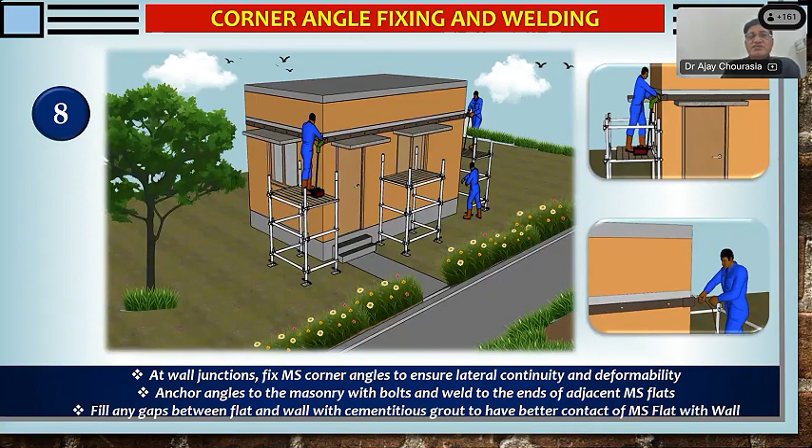It is better practice to adopt angle iron sections, provided at the corners, on the inner and outer face. Again, it can be connected in the similar fashion as I have mentioned.

Based on which seismic zone your building lies in, if you are located in seismic zone 2, 3, 4, or 5, you have to go to the appropriate matrix slot and then pick up the size of MS flat you need, the bolt diameter, the spacing of the bolt, and the corner angle and vertical angle you need to provide.

So definitely, the first column, corner angles, not needed in seismic zone 2, but in zones 3, 4, and 5 you need to have them. Take an example of seismic zone 6, three-story building.

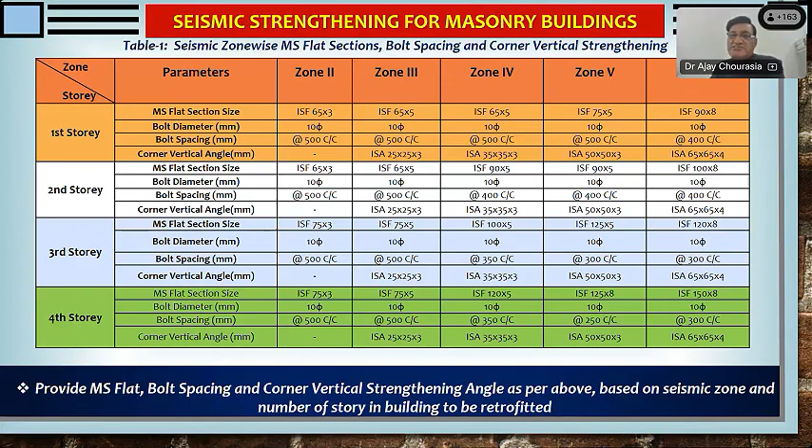I will provide ISF 120 by 8, with a 10 dia bar as anchor bolt at a spacing of 300 center to center, and as vertical confinement I have to provide ISA 65-65-4, adequately anchored and connected properly.

Now important thing is the cost. Our code says that if the retrofitting cost goes beyond 30% more than the cost of new construction, it is not suggested to retrofit—you can reconstruct instead. If it is an important building, then minimum 50%; if it crosses more than 50% of the new construction cost, then you should not retrofit, you can reconstruct.

But with this particular method, which is validated and tested, the cost of construction is somewhere around 3 to 4%, much less than the benchmark given by the codal provisions. So at a reasonable cost, you can make your unreinforced or vulnerable buildings also earthquake resistant, so that it will not collapse.

This method can be implemented while you are living in that particular building, and can be completed if all the materials are assembled in advance. So in a maximum of 3 to 4 days you can implement this.

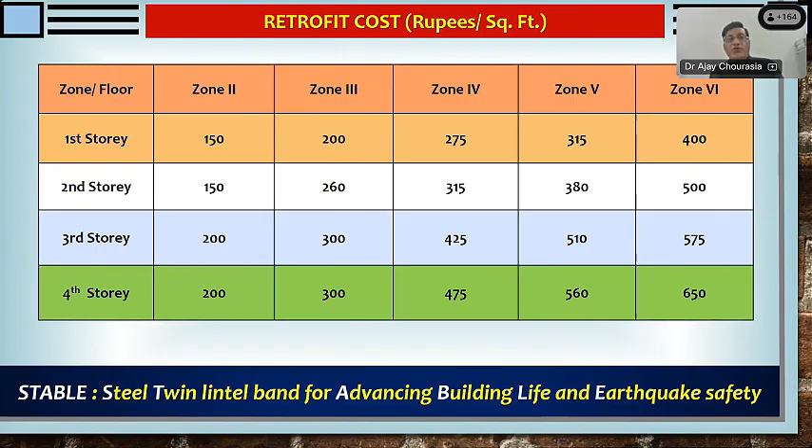It is scalable, less time consuming, cost effective, with no occupancy removal required and minimum hindrance to the occupant. Aesthetically too, if painted and hidden properly, it will not give a bad look. That is what we have evolved, and I recommend that this kind of technology needs to be implemented on a large scale if we want to really make our country resilient with resilient buildings or resilient centers.

This is high time that we should not focus on running first in the world to have the tallest building. The reality is that if your smallest building is safe, then only you will be really classified as a Viksit Bharat. So this is high time that we should focus on retrofitting existing buildings, constructing new buildings using good earthquake resistant measures, implementing bylaws, and promoting the use of confined masonry or similar construction with good earthquake resistant measures. Then only will we be classified as a disaster resilient country.

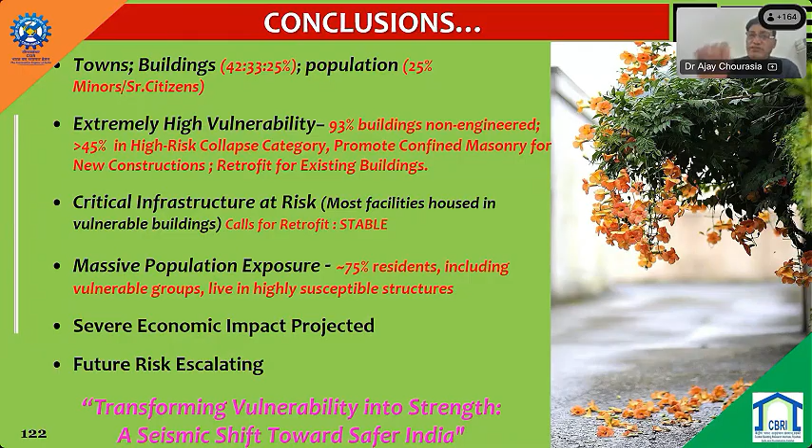There is a need for transformation of our vulnerability into strength, and for this purpose, if we want India to venture into it, all engineers should adopt this very seriously. That is what I want to convey to you, because you are all professors and teachers. Convey this, inculcate this kind of energy in your students.

I'm not saying thank you yet, but I want to request that you all are invited to visit CBRI Roorkee, Central Building Research Institute Roorkee. I have developed a construction technology demonstration park, where we have constructed 10 buildings, from vernacular buildings to blue sky research, that is a 3D concrete printed building, all of the same two-storied, same plan dimension, showcasing the different technologies and how effective they are.

It is not only showcasing, we have conducted all kinds of tests on those buildings, like gravity test, lateral load test, including comfort test, monitoring these buildings from thermal comfort point of view, and evaluating the efficacy of material also.

Now, when you are concerned about emerging construction technologies, you should not use them unless and until they are proven in the laboratory. They should be tested against all kinds of disasters, particularly earthquake, because 60% plus of the landmass of our country is sitting on high level moderate to severe shaking zones.